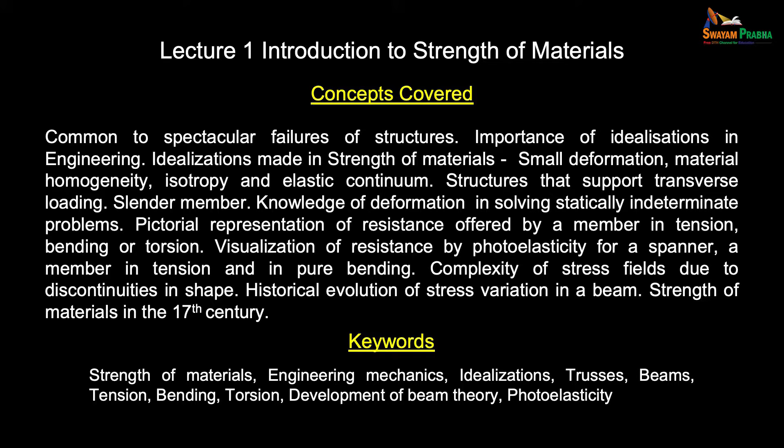So, welcome to the course on strength of materials. In fact, you graduate from rigid body mechanics to deformable solids. The moment you go to deformable solids, we do not make a step change. We say we will have small deformation. We have always been considering bodies as rigid. We will definitely accommodate deformation, but the deformations are small. How small? That is another question to be answered. And if you look at, you need to have a test, that is what is shown here.

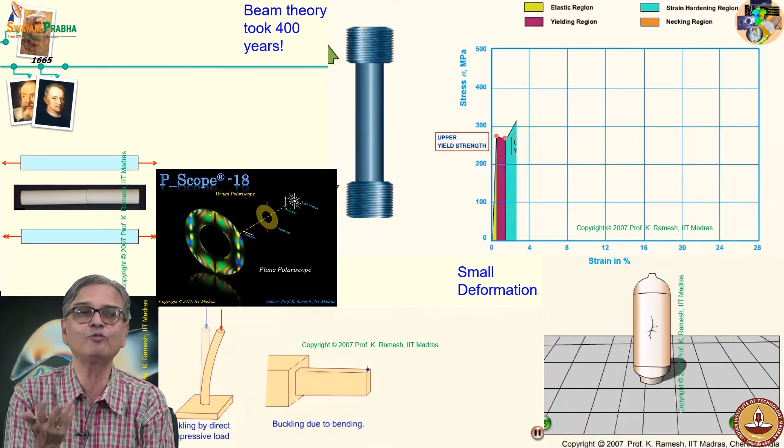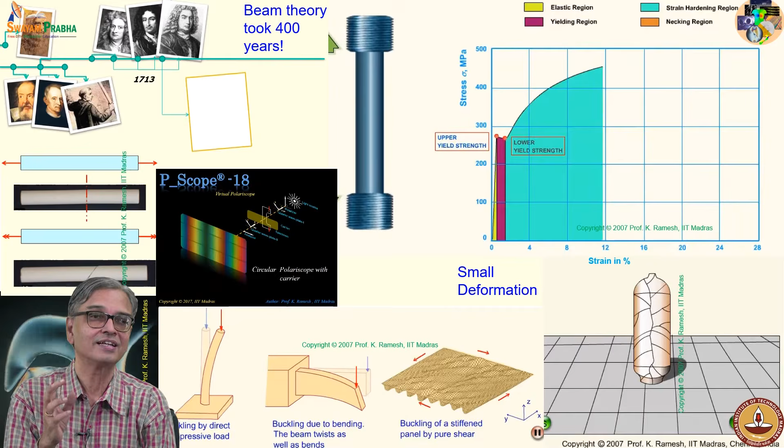And if I look at the curve what you had seen, mathematically how will you state that? Is it linear or non-linear? It is non-linear, fine. But cleverly if I say it is small, I can make it linear and make my life very simple. And this also summarizes some of the results.

You had spectacular failures, and you can also see the stress colorfully. There have been very simple failures which you don't want to have in your day-to-day life, particularly these plastic chairs. They are known for their notoriety. Many times they buckle. The fall appears simple, but it can be crippling you, because if there is a tendon tear, you had it, fine.

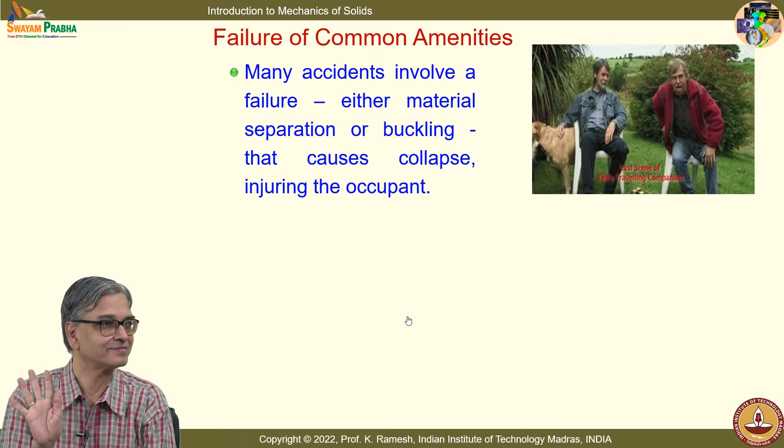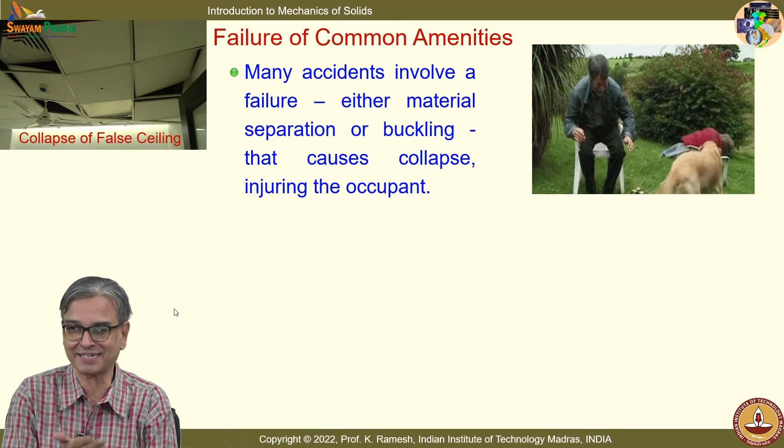And you are sitting in a nice room with a false ceiling. Imagine if the false ceiling falls like this. This in fact happened, fine. You don't want that to happen. That means you need to find out, have I made the selection of the cross section appropriate?

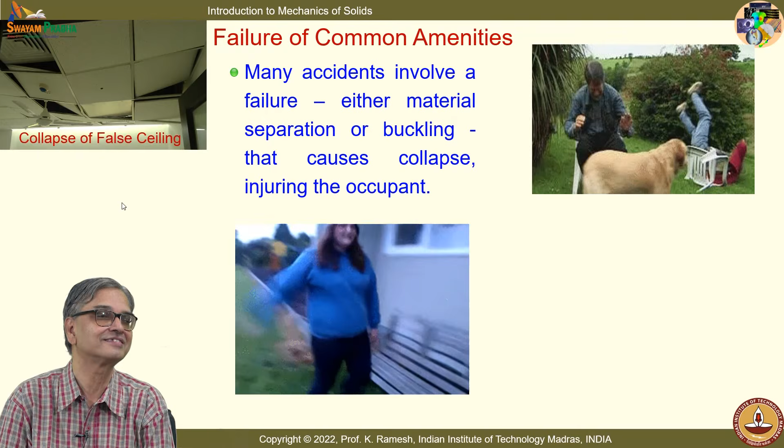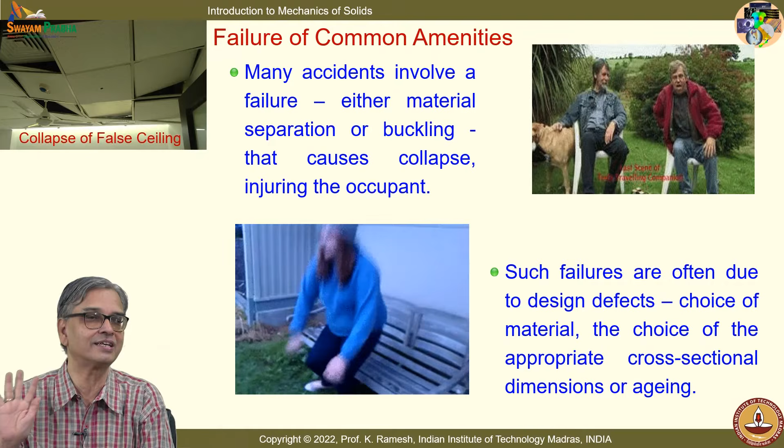And you go to the garden and you want to sit, you don't want to have a surprise like this. If you look at all of this, you find its choice of material, poor quality design, and also due to aging. Because if you see a garden chair that is exposed to natural elements, over time the strength degrades, fine. So, after learning this course, you should be able to sit comfortably in a chair, and you should also have your room well protected.

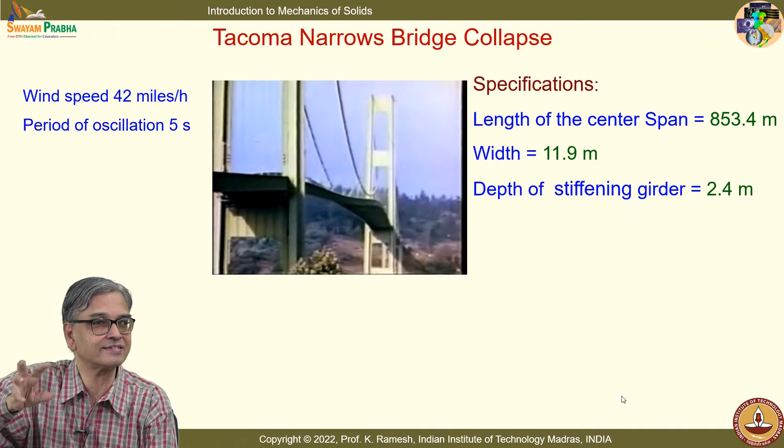So that led to development of cross bracings to sustain the wind loads. It started vibrating at 10 o'clock, vibrated for about 40 minutes, and it failed by torsional mode of vibration. Fortunately, there was no major casualty except one car was falling into this.

And there have also been failures precipitated by temperature change. Imagine people have built ships, this is during World War II, and you find thousands of them having failures, not one or two. If there is one or two, you can say that there is some kind of a manufacturing defect that has led to the failure. People also switched over from riveting to welding, and welding was in the nascent stage in those days. And when you had thousands of failures without your enemy bombing your ship, that is a cause for concern.

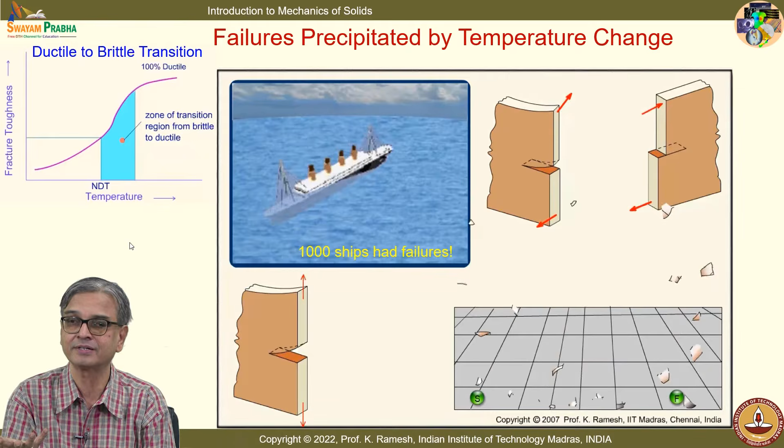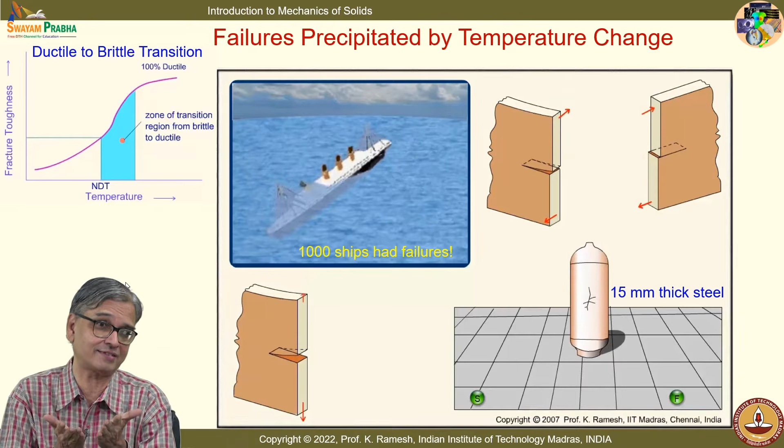Then you also had in the 1920s, this famous molasses failure in Boston. If you look at this, there was a temperature change. It was made of 15 millimeter thick steel, and you all know it's not made of glass. You can understand glass is brittle and steel is ductile. If that breaks like a brittle material, it's a cause for concern.

And you also have in your material science, you will probably go and learn there is a ductile to brittle transition. It happens at low temperatures, and there was commonality between the two. When the temperature was about 4.5 degrees, the steel gave way and behaved like a brittle material. And this is accommodated with the development of a new set of mechanics called fracture mechanics, fortunately beyond this course.

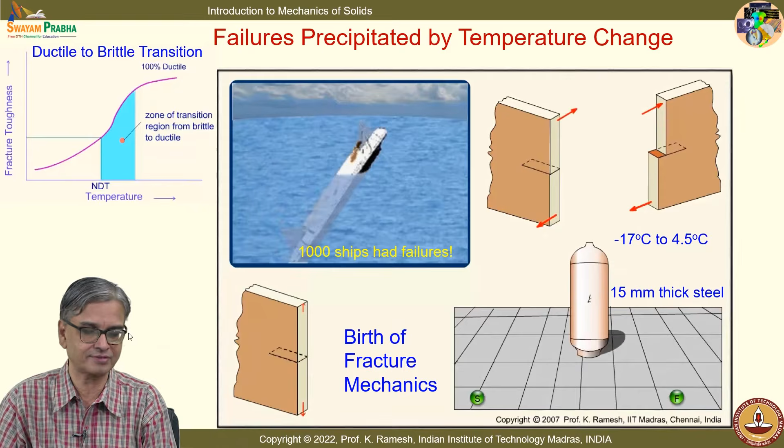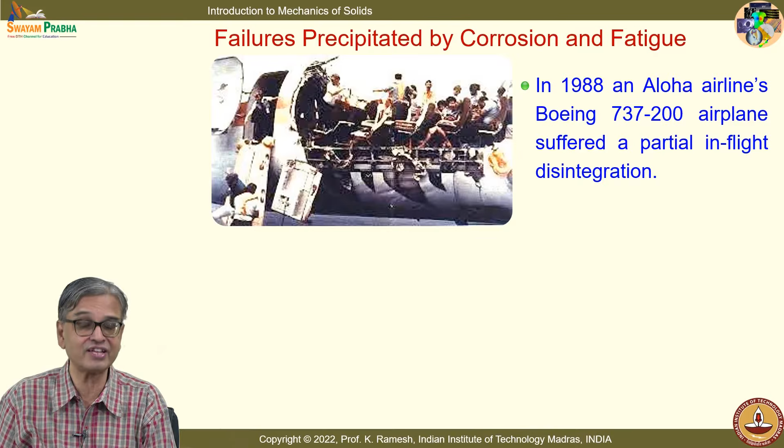And we also had another very devastating failure, the Aloha Airlines failure. The plane was flying at 30,000 feet. All of a sudden, a portion of the roof blew off, and the pilot landed the plane safely. You have to congratulate the pilot.

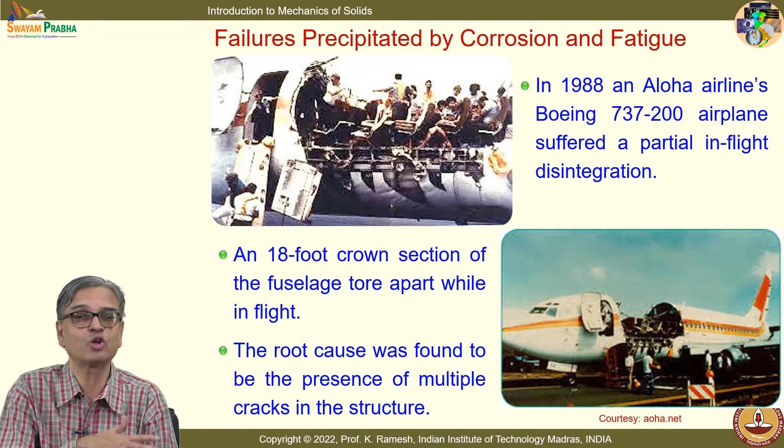There was only one casualty, but people understood that you have to design the aircraft so that it drains the water, otherwise it leads to corrosion. And you also have fatigue that has precipitated this kind of a failure.

There can be no engineering without idealizations. Why do we do the idealization? We would like to make the problem simple enough for us to analyze, because all natural systems are nonlinear and complex. And when you want to mathematically analyze, it's difficult to accommodate all aspects. Those aspects that are primarily important for the phenomena under study, you would like to capture.

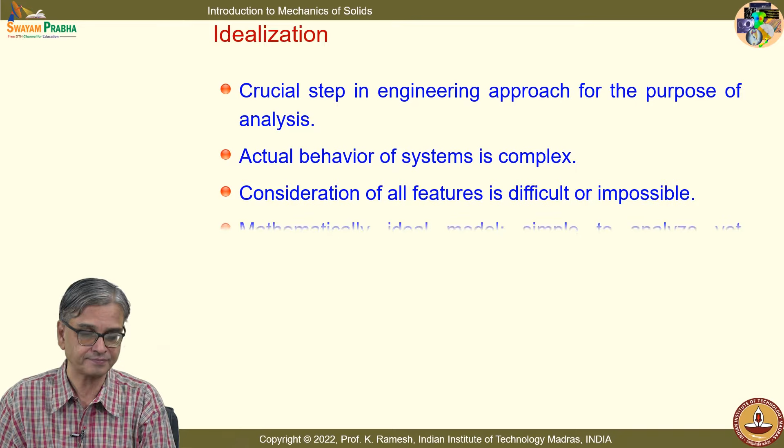What is the way that you can be satisfied that the mathematical model has sufficiently represented the physical phenomena? The only way is it should satisfy the observations or experimental measurements. Without experimental verification, you cannot rely on the mathematical model.

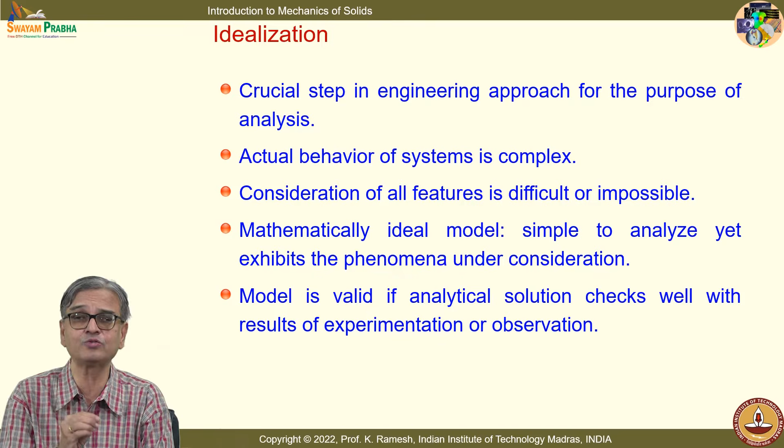So you have to always understand, if DGCA has to permit the aircraft to fly, it should satisfy the safety norms, not just that your design is sufficient. So that is taking safety into consideration. You always need to have experimental information.

When you look at engineering mechanics, you had done the first course, mechanics of rigid bodies, which was divided into statics and dynamics, and further subdivided into kinematics and kinetics. So you could do one full course considering the body as rigid. No longer can you live in that domain. You have to graduate, so now you go for mechanics of deformable bodies.

Here you start with strength of materials, where you cleverly conjecture the deformation, select cross sections, make idealizations, so you avoid solving differential equations. Then you graduate to the next level of course, where you solve the differential equation and solve more complex problems in theory of elasticity and much more complex problems in theory of plasticity.

In contrast, in mechanics of fluids, even when you analyze the ideal fluid, you solve differential equations. So there is a fundamental difference. In this course, we would do thought experiments, try to get it from inference, and also develop the equations mathematically. A rigorous mathematical approach will also be there.

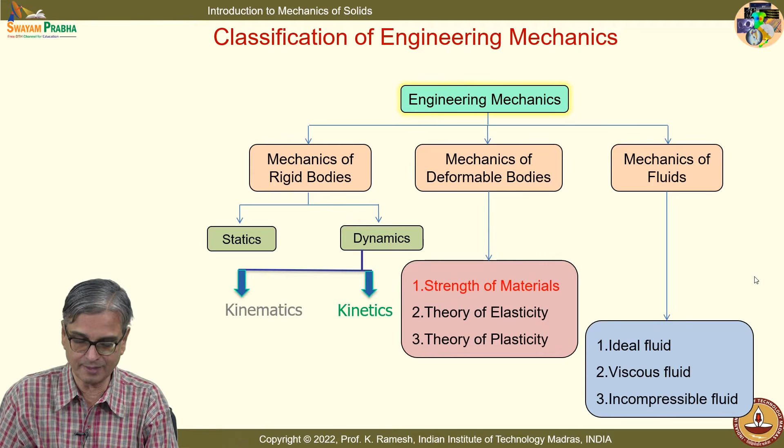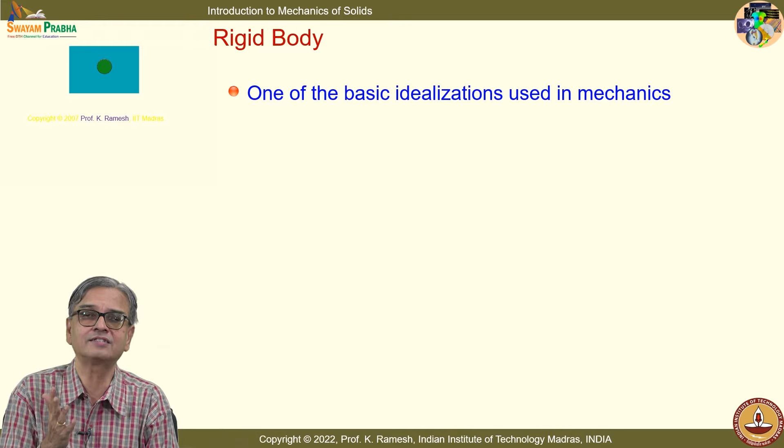In the previous course, you considered the body as rigid. When do you say the body is rigid? What is the way you idealize the body as rigid? What does a rigid body mean? No deformation, otherwise the distance between the particles remains the same. Is it really so? It's an abstraction. You are talking not only about the physical abstraction, but also the physical action.

In the previous course, you have left and right used the concentrated load concept. The concentrated load concept goes hand in hand with rigid body. What is shown in this insert is you have a distribution. From the distribution, you find out, using composition and resolution of forces, a concentrated load. So you keep your eyes half closed.

Reality is always deformation, however small, there is deformation. At suitable magnification, you will be able to perceive it. But we have ignored it. We could solve a variety of simple problems. We could find out what forces are happening on the system under consideration. So it was useful, it is not that it was absolutely useless.

So this is what is summarized here. I said it in statics as well as dynamics: you cannot use it indiscriminately. Physical actions, that is concentrated load, is an abstraction that goes hand in hand with rigid body idealization.

In engineering you have to support transverse load. You have studied trusses in your previous course. Can you recall what kind of forces was resisted by the truss members? It is resisting the transverse load acting on it. But what was the resistance developed in the members? You have determined that by method of sections and method of joints.

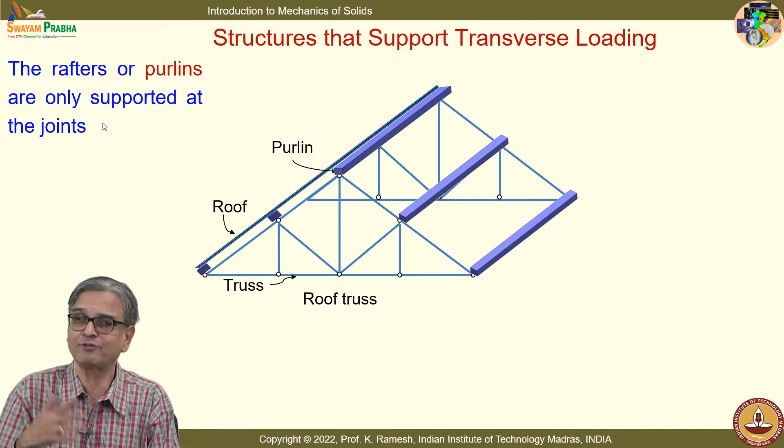Can you recall what it is that you found out? You will also have to find out the sign and then say whether it is axially loaded. I have a transverse loading happening on the structure, but by the way you have constructed the truss, and the restriction that load should be applied only at the joints, and joints have to be constructed in a particular manner, all that you do because you get an advantage: the members transmit only axial load.

But to do that, you also had rafters. These rafters support bending.

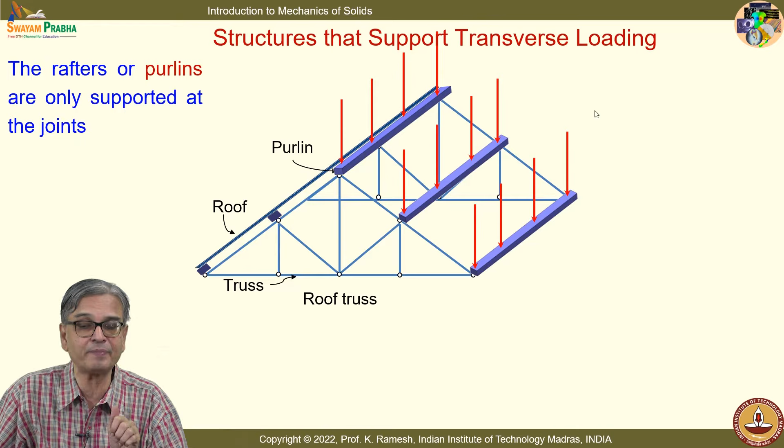Tension or compression is easy to comprehend. Bending is not so; it has taken close to 400 years to understand. We are going to complete it in a few lectures.

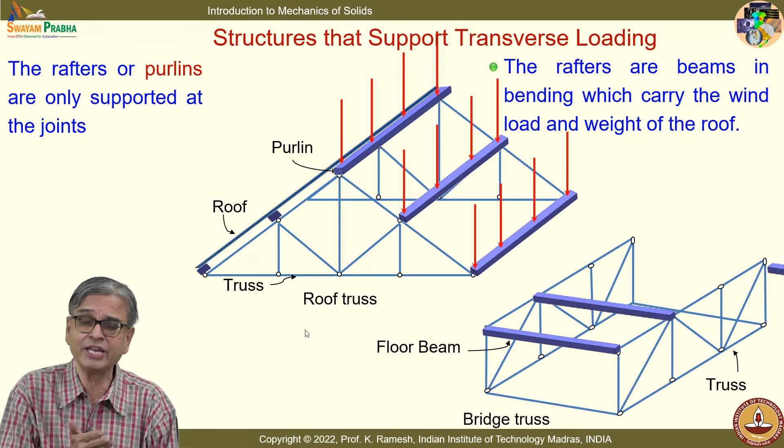You also have bridges. Many of these bridges have truss construction along with floor beams. The floor beams take the transverse load and resist it by bending. But in your previous course, you analyzed only trusses, and found that they transmit only axial loading. This again has transverse loading like this.

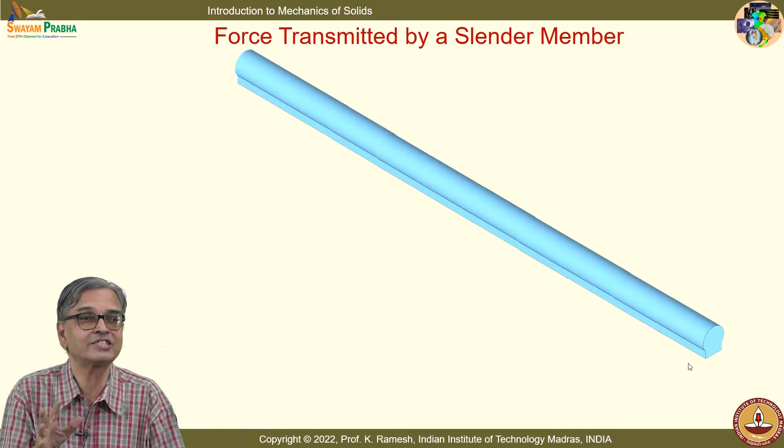Another important assumption you had made is that we confine our attention to slender members. What is the definition of a slender member? The length of the member is much larger compared to the cross-sectional dimensions. We make these idealizations to analyze structures with deformation which can be captured mathematically.

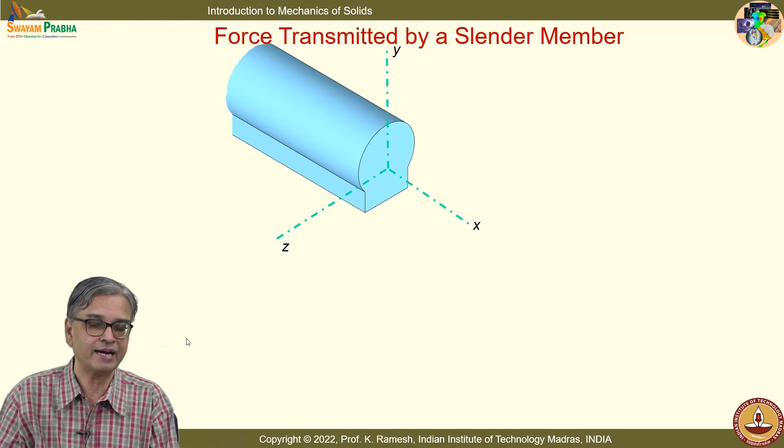You also learned in the previous course that I can take an imaginary cross section, and this imaginary cross section can support a force and a moment. This force can be visualized as 3 components, and moment also can be visualized as 3 components. Whenever the component is tangential to the surface, you call it a shear force.

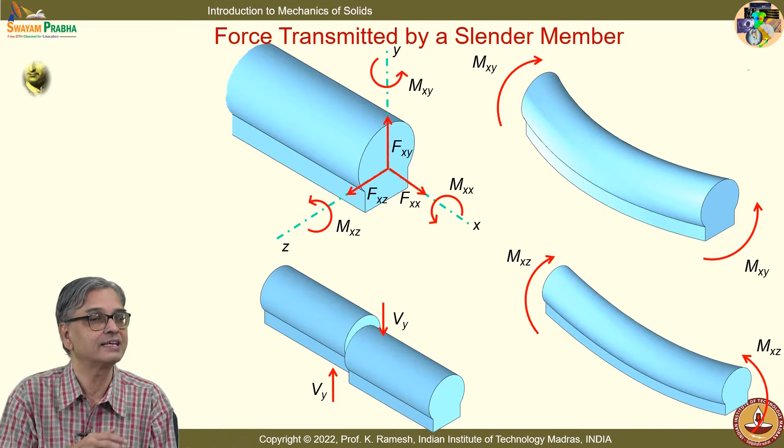You have done, in the case of beams, how to find the shear force diagram. Then you learned if there is a moment, how the beam bends—it can bend in one axis. If I have the moment in the other direction, it can also bend in the other axis. In addition, it can also have another shear force as well as axial tension or compression, or a twist.

This is what we understand now, but if you go back to history, at that time they were really feeling that these arbitrary sections can support tensions. That is the way they started, and the credit goes to Leibniz in 1684 and Bernoulli in 1691.

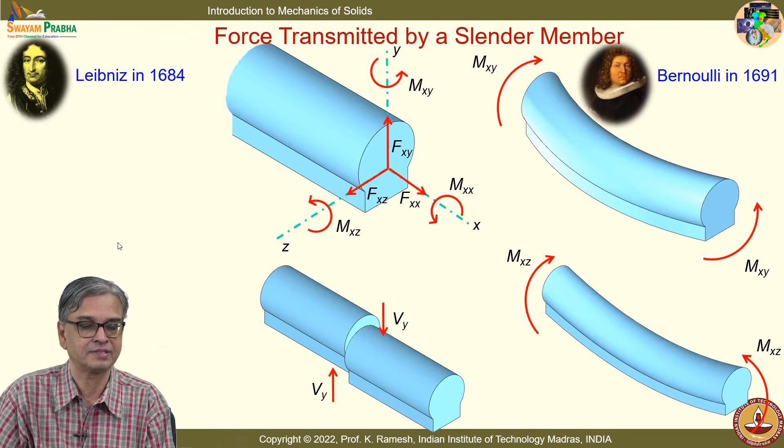The real situations are very complex. We mathematically model it and come up with a result closer to reality. That is the difference between engineering and mathematics. We bring in correction factors, stress concentration factors, and somehow wriggle out of the situation. We want to provide solutions to complex problems.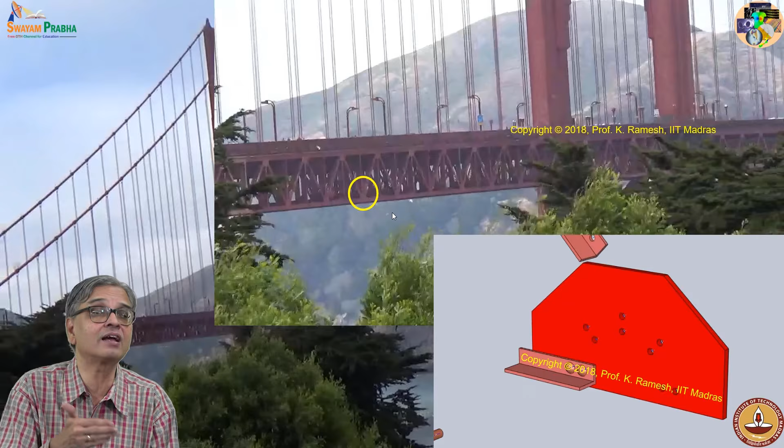If I have a closer look, I can see the truss and also a joint, how it is constructed. You have learned that at this joint you should have a concurrent force system. You have a gusset plate, you join the members, all done carefully so that none of the members forming the truss are subjected to bending. Even if it bends, even if you have to consider the self weight, you simply lump it in the joints and proceed as an approximation.

Because now you have software which will find out the actual stresses, and it is all very efficiently designed. Do not carry the impression that you do a crude analysis in your class and the same thing is practiced in real life—it is not so.

You also find various cross sections. As far as axial load is concerned, whether I use the I cross section, channel, L angle, solid rod, or hollow, it really does not matter—it is based on convenience. What matters in the case of axial loading is only the cross sectional area, that knowledge you all have.

The situation is quite different when the member has to support bending or torsion. Cross section matters. It is not only the cross sectional area size, but how the cross section is made—that matters.

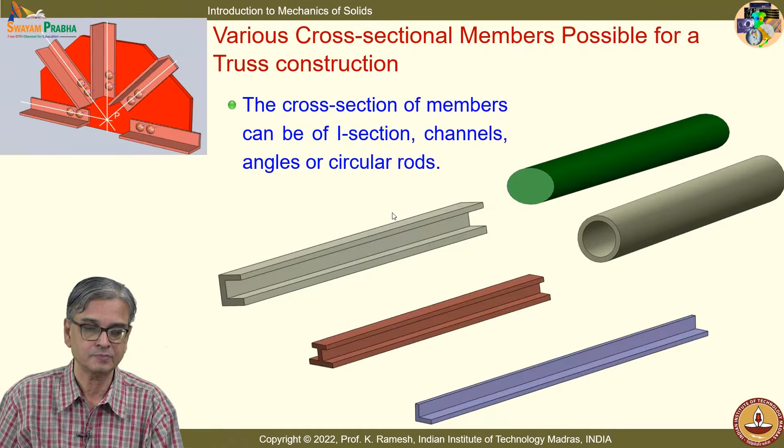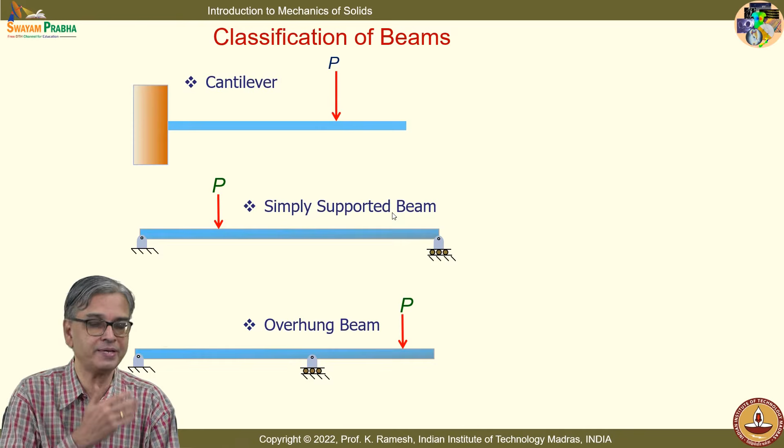You have also seen that by considering the body as rigid, you have happily solved problem after problem on beams. I have two families—I have shown the first family, I am showing the second family. Can you recall, is there a distinct classification in the first column and the second column? Is there any distinct difference? Do you perceive it?

So the first column you say is statically determinate, because I can find out all the forces in the system with the help of equations from statics. The second set, the equations are not sufficient to evaluate the unknowns, and you label it as statically indeterminate and you close your eyes.

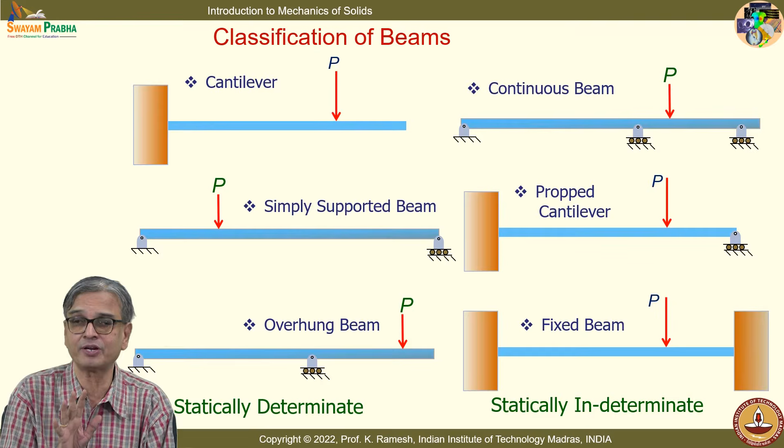But in reality, you have to find a solution for that also. Unless I bring in the deformation, it is not possible to solve these problems, and bending deflection is very complex, so we will postpone it. The idea is you cannot live on the comfort of rigid body mechanics, you have to graduate to deformable solids.

And you can also draw axial force diagram, shear force diagram, bending moment diagram, twist moment diagram. Why do you do all that? So in a cross section you find out where these are maximum, the hope being that you determine the cross section based on the maximum, so that it will withstand your requirement.

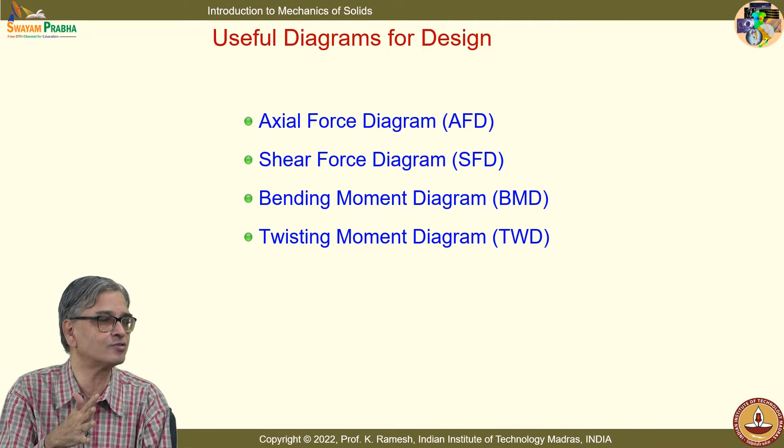You have also done SFD and BMD, and those who have looked at my engineering mechanics course, I discuss at length the possible sign conventions. I used one sign convention followed by Meriam for that class, but in this course we will follow a sign convention for shear: on the positive face, positive direction is positive; on the negative face, negative direction is positive. Bending moment, there is no change.

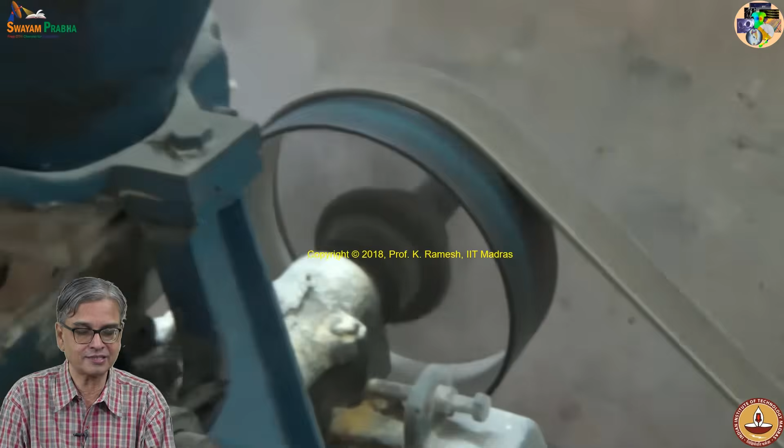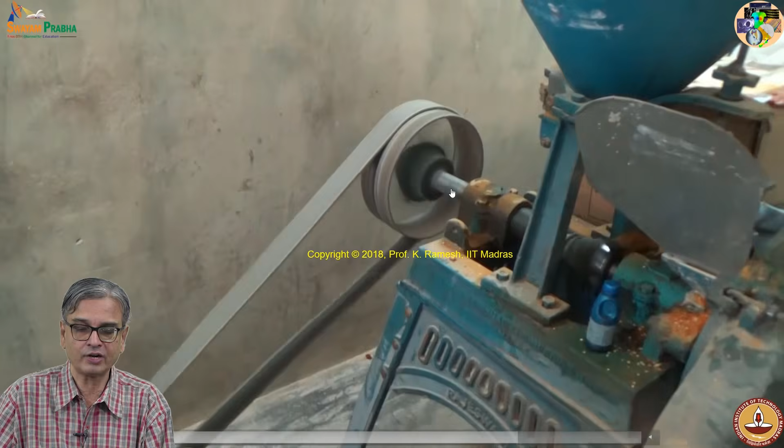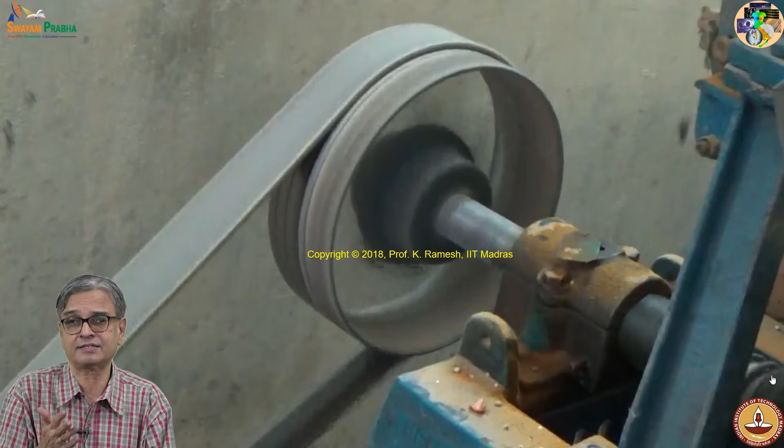And you have a down-to-earth example, this is there in every city, an atta chakki, and we would see a shaft that is transmitting torque. This is also supported by bearings and there are things that oscillate from this. So this shaft is subjected to torque, subjected to bending, and in some cases you can also have axial loading. If I have to mount a pulley or put it in a bearing and so on, I can't have a uniform member.

I can't have a uniform member. I would have steps because I need to locate various members. But in this course, we will close our eyes and consider a slender member. Even that, when you consider deformation, is backbreaking.

And you all know once I bring in deformation, there is resistance to deformation. What is the typical variation? The resistance is termed by the terminology stress. And even before we get into the full course, I thought it desirable that we look at the result that we are going to get.

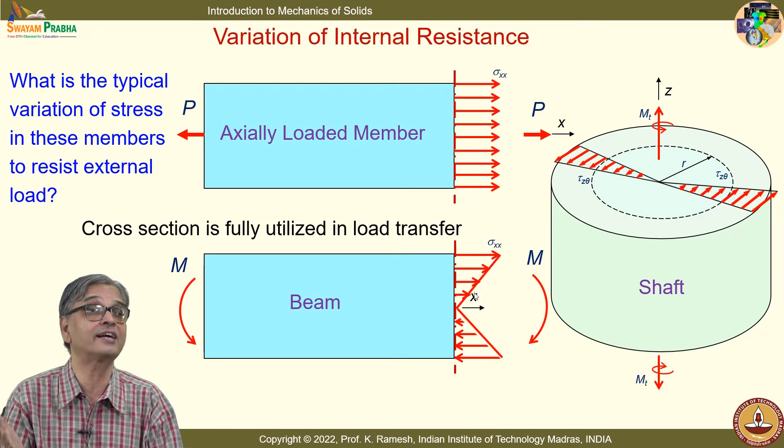We will see that. So the message here is why you develop a truss in such a manner: you utilize the material very well, because whatever material you put in, every part of it contributes to load sharing. And you are also very clever, a transverse load is felt as axial loading.

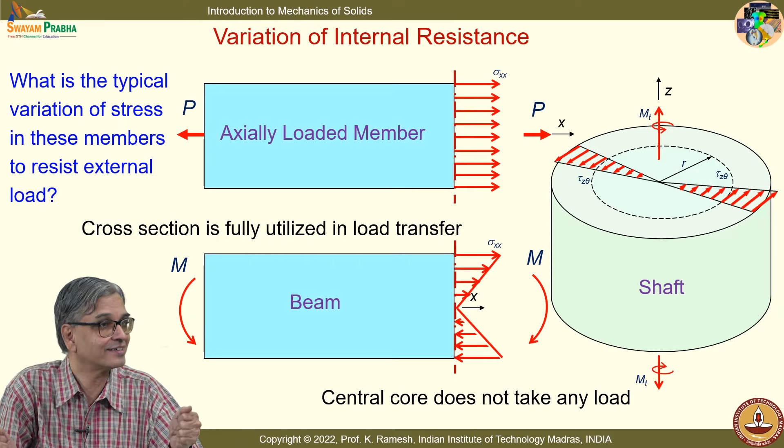Now you have the advantage of this knowledge. If you had no knowledge of strength of materials, even though rail lines span several thousands of kilometers across the globe, you would have made them as solid blocks like this, without cavity on the sides, because you'd want them to be solid and resist without anything happening. In reality, all these are like I-cross sections, you do not have material here. So tons and tons of steel have been saved. Knowledge of strength of materials is essential, and we have saved material because of that knowledge.

The rails essentially transmit and resist bending loads. Now the idea is, you and I have stress due to various reasons. You have to write examinations, I have to come to class and make the lecture go smoothly. There is no way that you can take an X-ray or some photograph and find out what level of stress you have.

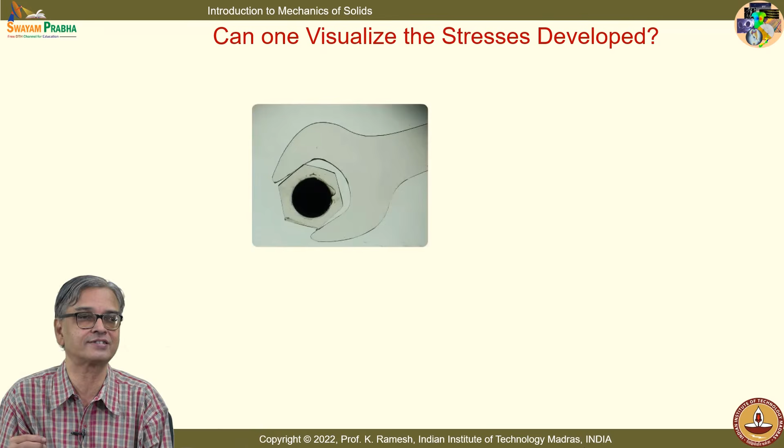Fortunately, nature is so benevolent. You have a methodology called photoelasticity that gives you the stress pattern in colors. As children, you would have had the opportunity to tighten a nut with a spanner, so that is what is shown here. For me to show you colorful fringe patterns, these are not made of metal, but a suitable plastic amenable for photoelastic analysis.

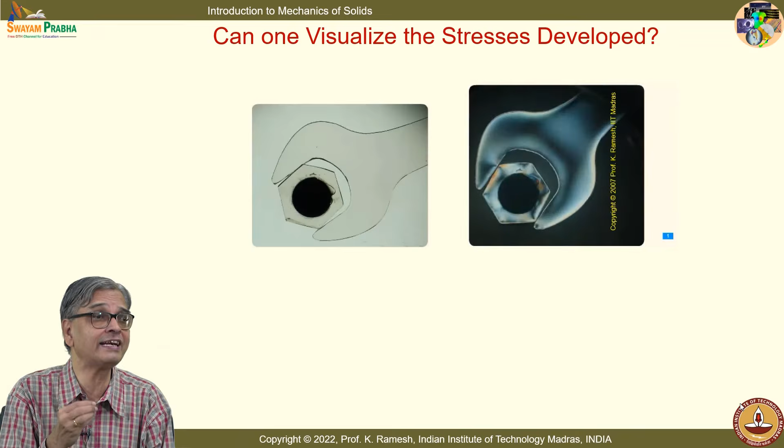When I view it in the polariscope, I see that as the load is increased, more and more colors develop. Do you see that? So you can infer that the colors are directly related to the load transmitted by the member, and you can see that clearly. You observe the fringes developed here, and you also see the cross section - it is not constant, it is increasing in regions where more stresses are developed.

If you look at a spanner, it is a well designed machine component. Even with this course, or in the next course, you would not have a solution for this - it's too complex a problem. But if you go to an experiment or a numerical method, it is easy for analysis. So the first inference is: I have beautiful colors, and I could visualize they are related to the load applied.

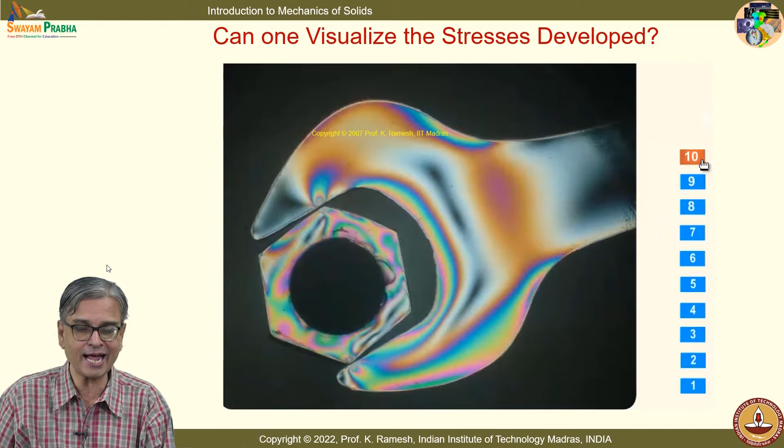With this background, we will go and see what happens when I apply axial tension and bending to the same material. I have a simple beam made out of this, and I get colors like this. As we said, over the cross section the response is uniform. What do you see in colors? You see that at every point when it is axially loaded, it's a uniform color.

What happens when I go to bending? I have all the colors in this spectrum available when it is bent. So the response from an axial load and the response due to bending are different - that you can clearly see.

Now I will also repeat it with a smoother variation. You observe how the bending loads are reflected as resistance in the colors. You actually find that the fringes are appearing and then move towards the center. If you look at these, I have labeled them 0, 1, 2 and 3, and if you find the distances, they will be equal. So by inference you can say the variation is triangular like this.

Now let me address this - I said that in this course I am going to take a member which is slender, without any step, without any hole. But in reality, you can't have anything without a step or without some hole for you to join and so on. I can also conjecture and get an idea of how the stress problem becomes, from the same photoelastic approach.

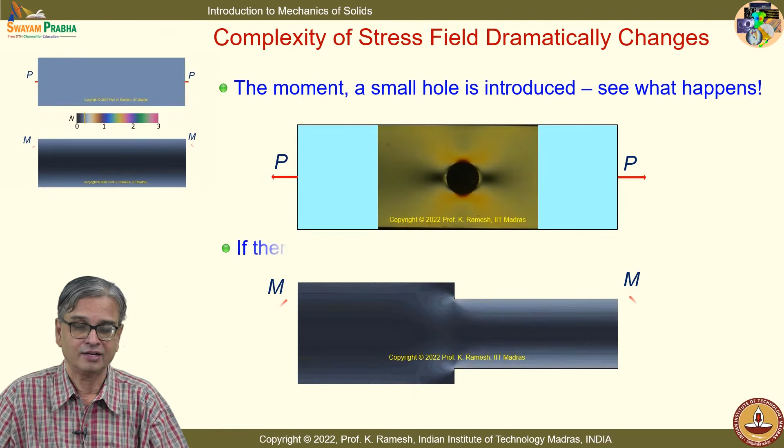Okay, I put a hole and then see what happens. For you to make a new design, you get a flowery pattern - you can print it on your cloth and sell it. But it's too difficult to analyze mathematically. And look at what happens when I have a step.

I already told you, when you have a shaft, you will have to have steps for putting the pulley. You have to have a step for putting a bearing. You can't avoid that. But the moment I put any one of these aspects, the problem becomes very complex, fortunately beyond this course.

You can also make one more interesting observation. In the case of bending, we have seen parallel lines essentially. I have a line drawn here. In this zone, it is still parallel, and in this zone it is still parallel. Some disturbance happens in the vicinity of a step. That is how engineers handle it - with a correction factor or stress concentration factor, to wriggle out of the complex problem.

So even to understand that a beam will resist which has a triangular variation, that was not a simple thing to visualize. So now let us look at the idealizations.

Small deformation - the reason why we go for small deformation is you can make the problem much simpler to handle, and the implication is we work on undeformed configuration, but we will also make a violation. When we want to go and do buckling analysis, I will have to write the governing equation only in deformed coordinates. Fine.

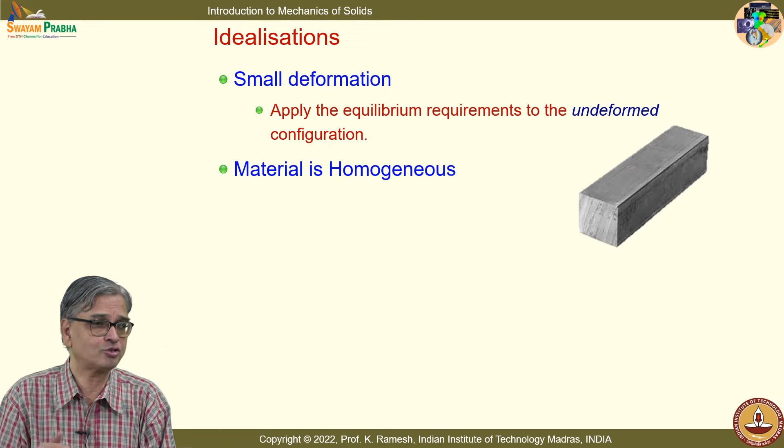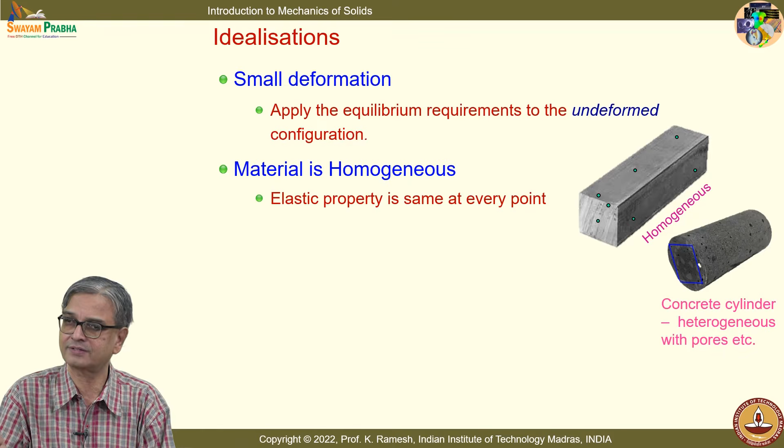And you also say the material is homogeneous. What is the meaning of homogeneous? When I consider any point, the properties remain same, elastic properties remain same. And you have a counter example - take a concrete block. If you have seen how concrete blocks are made, you find they put pebbles, cement, sand and all that, and it also has pores. It's definitely not homogeneous, but you analyze it as homogeneous - that is a different story.

And you also idealize that the material behaves in an isotropic fashion - you take any direction, the elastic properties remain unchanged. These are all idealizations that make your life simple. Another important one is it is an elastic continuum, no defects. Even if there are defects, in this course we will simply close our eyes. You have fracture mechanics which takes care of all the defects. Fine.

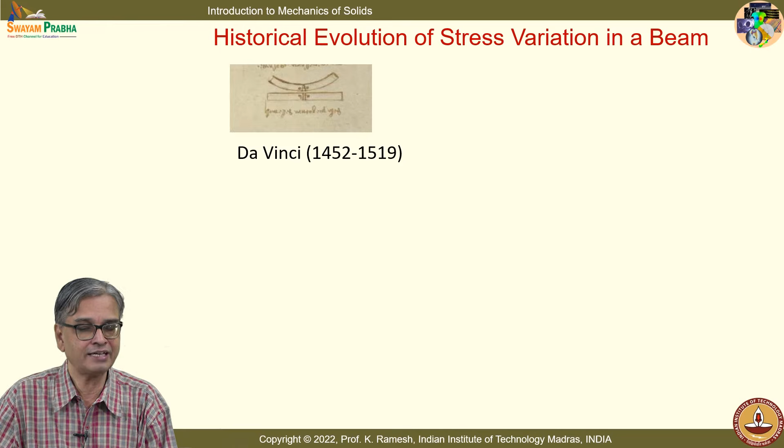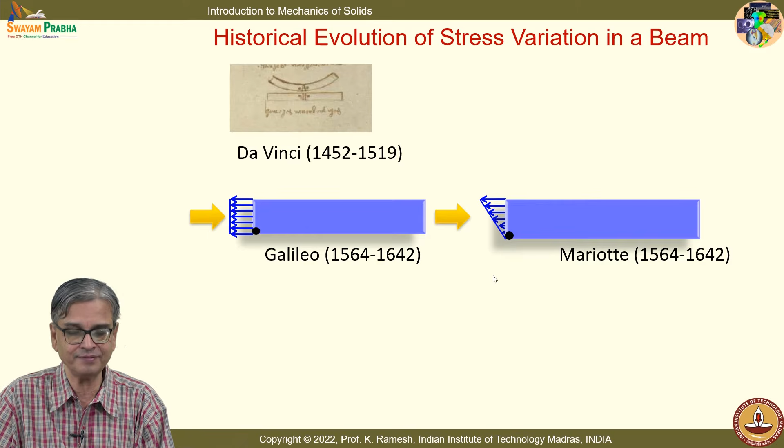As I said, historical evolution of stress variation in a beam, it all started with Da Vinci, who had in his notes diagrams drawn like this. Galileo conjectured that the resistance is uniform, and Mariotte conjectured a triangular variation in one fashion - he also quoted another variation like this. Then you had Parent, who also conjectured triangular variation, but the neutral axis, what we will call later, is shifted. So it was finally Coulomb who got the same triangular variation that I showed as the result we are going to learn in this course.

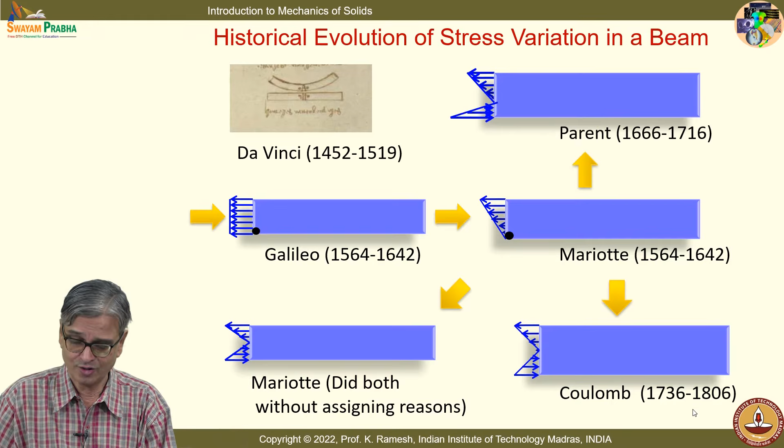So if you look at the time span, it has taken close to 400 years. So it is not a child's play. If you do not understand some aspect of the course while developed, do not feel discouraged. So we look at some of the historical developments.

Da Vinci, 1452 to 1519, was the first person to document a theory. Until then people were not documenting. He had also written a book - unfortunately it was lost, they could not locate it. They could locate it only in 1967. So whatever knowledge he gained, others had to struggle from scratch. But historians go back and reinterpret what he could have understood at that point in time. That is also interesting to see.

And we sit in Newton's garden - he is sitting with the apple tree and the apples are falling and he is getting inspiration. So we are also getting inspiration by looking at the history in Newton's garden. Recently, there was a storm in the UK and this apple tree got uprooted. It seems they are going to replant it and so on and so forth.

By digging into his notes, people have found that he had the essential features of the strain distribution in a beam, but he did not have Hooke's law at that time. There was no mathematical development of calculus, so he had to wait. Understanding could not be translated into mathematical equations, but he seemed to have understood some of it.

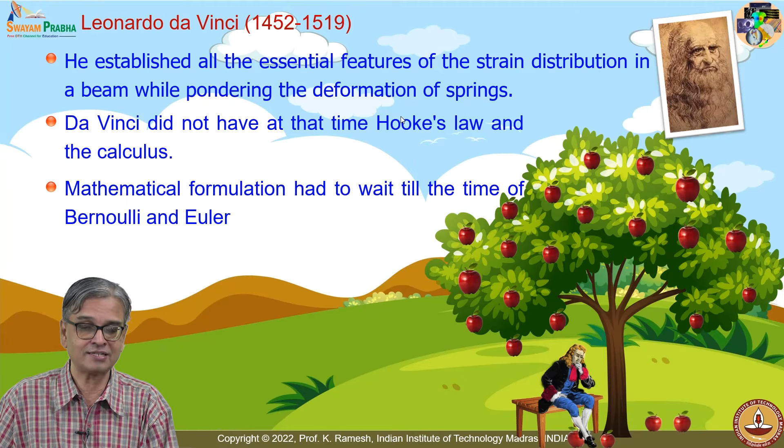Even though he was able to appreciate the stresses that had developed, he was not able to give a recommendation on how to design a beam, what should be the cross section. That kind of solution was provided only by Galileo.

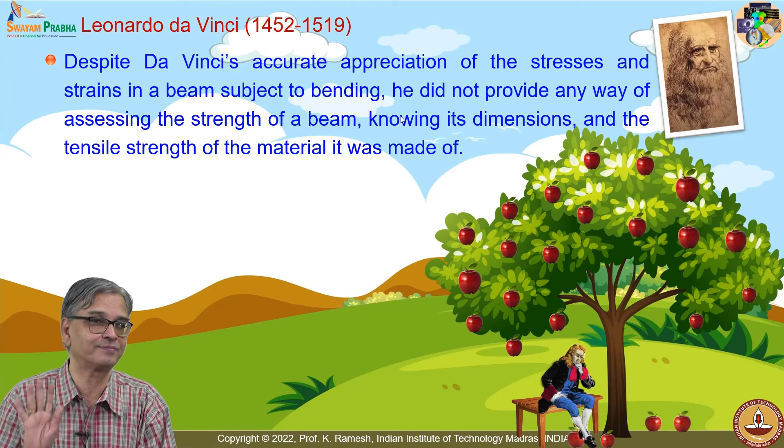Even though Galileo provided it, he had his own limitations. Galileo was 1564 to 1642, the first person to publish a solution to this problem.

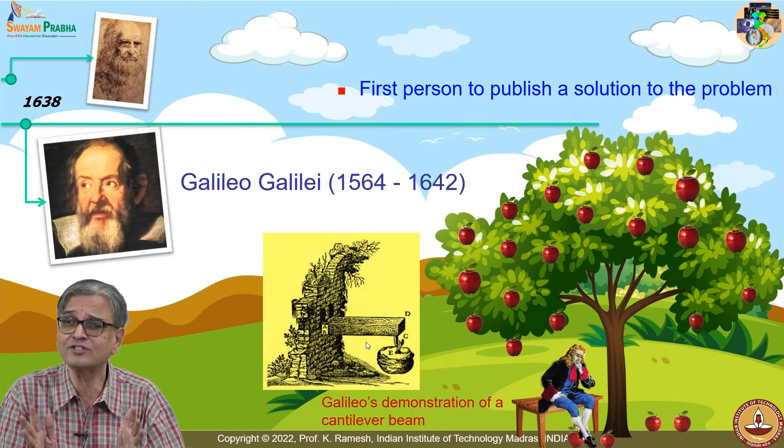And it is made of wood. Wood is not an isotropic material, its fibers are aligned, so it is a complex material.

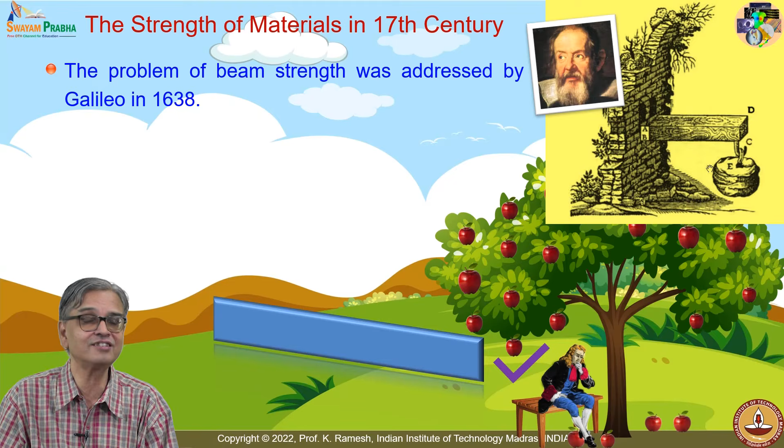So strength was addressed by Galileo in 1638, but he found a very interesting answer. The answer was, if you take a scale and put it in this fashion and apply an end load, clamp it on one end and put an end load.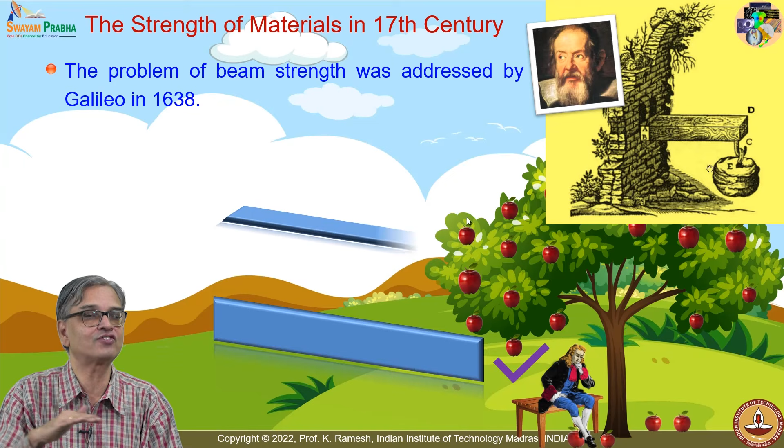There is a stark difference between the moment of inertia that you have to calculate. He had got that intuitively. So he was able to say you should not use the beam in this fashion, you should use the beam in this fashion.

The ruler offers more resistance lying on the edge than when lying flat. It is a very important, valid observation. He did not have a mathematical explanation for it. We can give a mathematical explanation once you learn bending.

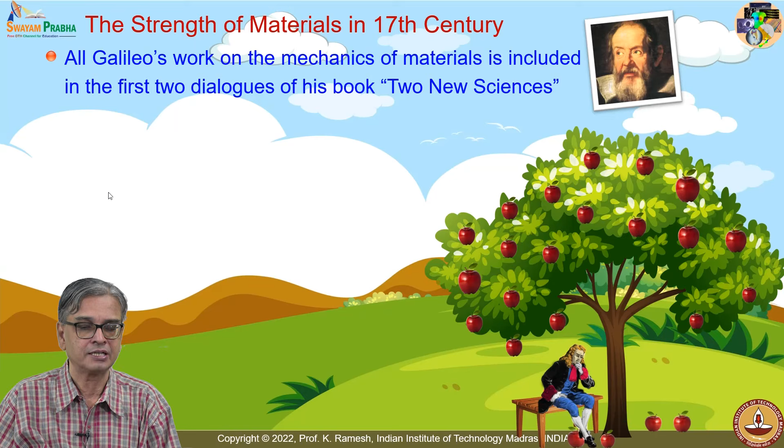And they have all worked on tension. In simple tension, the strength of a bar is proportional to its cross sectional area and is independent of its length. It is a very correct observation. Length does not contribute to it, only the cross sectional area.

Translating this understanding from a tension specimen to bending was not simple. They have all understood what happens under tension, but only some observations on bending.

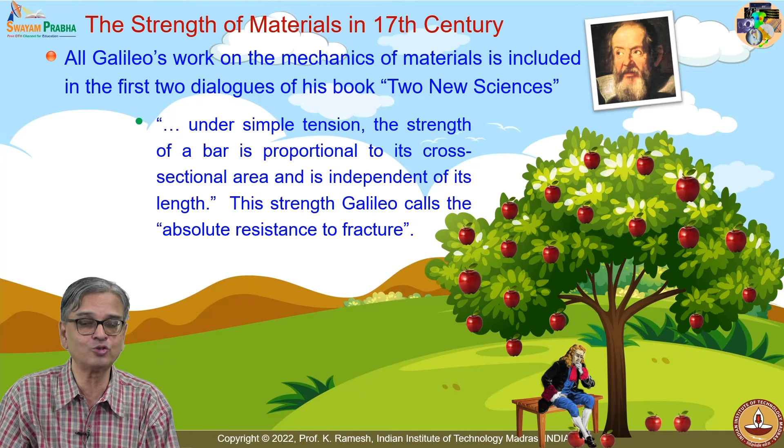And the reason I said certain aspects earlier, even the problem is complex, because I am having shear force and the bending moment varies across the length. While we develop the beam theory, we are very clever.

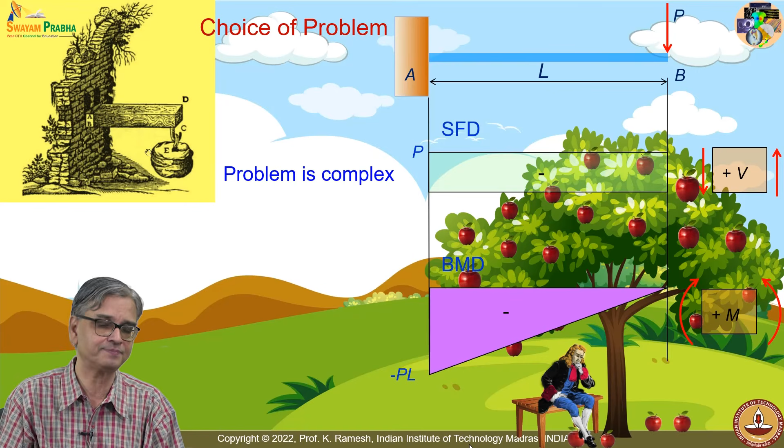We will take a beam under pure bending, we will avoid shear. So why could Galileo not succeed? He took a complex problem. He took a beam that is not slender. The material is wood, it is orthotropic.

But they also looked at what happens. When you want something to support load, you want that to be solid, isn't it? Solid means something completely filled. But he found in nature, when wheat is fully grown, the wheat stalks are hollow, and they carry heavy grains at the end.

So he wondered that hollow beams can be stronger. Nature has taught us, but there was no explanation at that time. But when you say hollow beam, what you have to compare is what is the cross sectional area of a hollow beam versus the cross section you make out of the same material as solid.

If you have the hollow beam like this, imagine that this is hollow. If I compare it with the same size of solid shaft, you can't compare, that is not a valid comparison. In strength of materials, we would like to use minimum amount of material.

So he made very interesting observations about bending, but some of them could not be translated into mathematics because he did not have access to it.

And you had Robert Hooke. He was considered the greatest experimental scientist in the 17th century. He was also appointed as a curator for the Royal Society.

The idea is that whenever somebody postulates a new theory, he will try to make a contrivance to prove or disprove that theory. So he was good with his hands, and he was able to look at what happens.

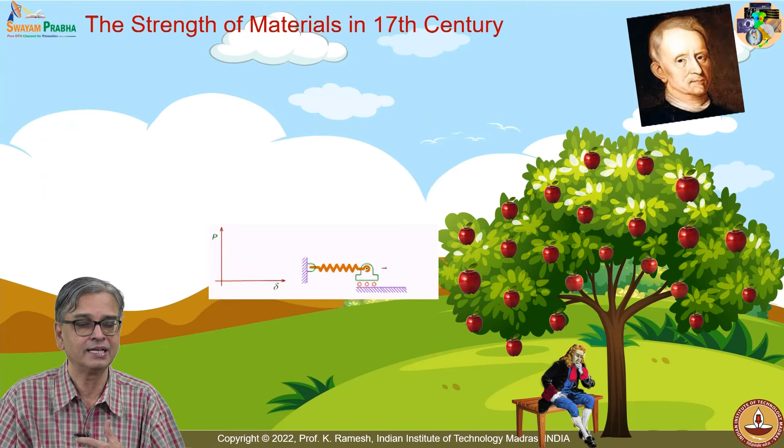And he found a very interesting thing. He found that many materials, when loaded, behave like a spring. In what aspect?

The spring, when you elongate it and leave it, comes back to its original position. And he also found that this varies linearly.

But let me ask a question. Go back and find out, you all have a pen like this with a jotter type of arrangement, you will have a spring. When you put an axial load on the spring, with your background, is it possible for you to find out what is the force transmitted at a general cross section? It is not axial load. Please go back and see.

So when you say Robert Hooke looked at the spring, when you say axial load, when you pull the spring, it is a representation here. I have just put zigzag lines, but actually the spring is coiled like this. So if you look at what kind of forces are transmitted at a generic cross section, it is not axial load. But this example is good to show that there is elastic recovery, and the force deformation relationship is linear.

The resistance developed in an axial pull, or what happens in a spring subject to axial pull, are different. Because you have to understand, you have the background. Let me see, I want to know in the next class what is it that you can do.

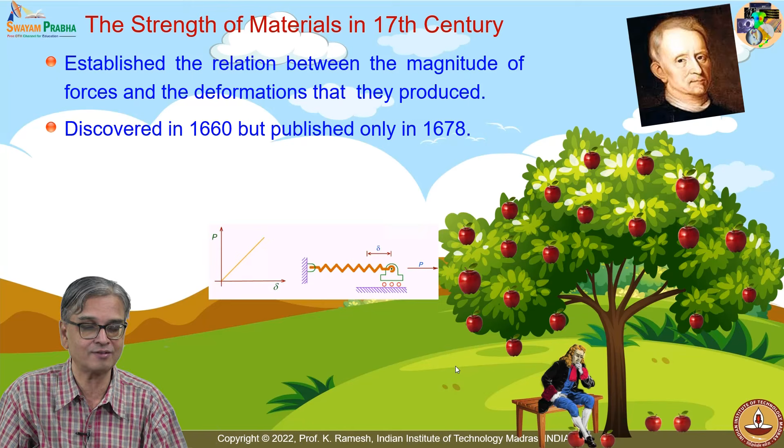And this linear relation formed the basis of Hooke's law. Even though he determined this in 1660, he published it only in 1678. Those days, though my slides are very poetical, nicely colorful, richly decorated, science development has not been poetical. There were fist fights. There were fights where people wanted to say, I have done it first. And they also camouflaged these results as anagrams.

And then, knowledge is power. They were not willing to disclose. Imagine, 18 years he has not published the result.

Then you have Mariotte, 1620 to 1684. And as we have already seen, he had proposed two results of variation in the beam without a reason. So we will have to say that he had right thinking in that direction, but he could not completely succeed.

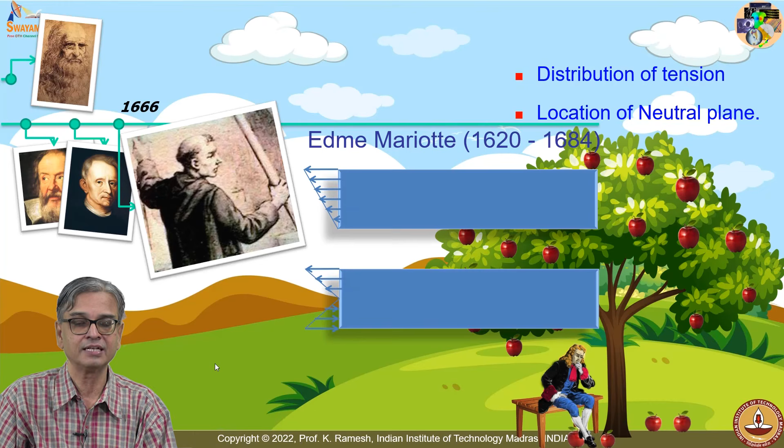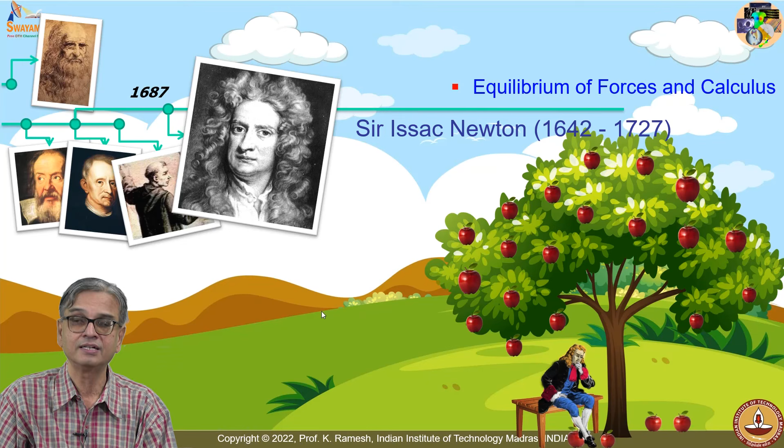He had postulated this variation as well as a variation like this, though this matches with current understanding, there is no clarity. Then you had Isaac Newton, who made very significant contributions, and the modern world gives credit for calculus to Newton. We will see some information from India in the next class.

You also had Leibniz. And I said, the moment you go from simple tension to bending, the shape of the cross section matters. The shape of the cross section does not matter in tension or compression, only the cross sectional area matters.

Even Galileo found it in his experiment. Shape matters, and this was brought out when you do the bending. People also developed something called a section modulus, and that is credited to Leibniz. He has also been credited for development of calculus.

So in this first lecture, we had a brief overview of what is the type of mathematical step that we are going to make. We are not going to live in rigid body idealization anymore. We would take a baby step for deformation. We will make that a small deformation.

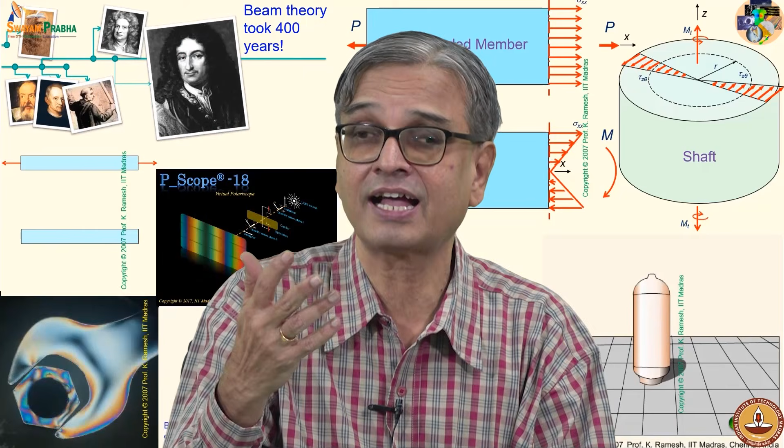And we have also looked at a priori what is the result, how resistance develops in simple tension, how the resistance develops in bending, how the resistance develops in torsion, but we could see experimentally by photoelasticity the play of colors in tension and bending. That has given an inference that the cross section equally participates in axial tension, whereas in the case of bending, the inner core does not contribute to load sharing.

And we have also said material is elastic continuum. We will hang on to it because all our mathematical development depends on that idealization. And I said you have a spanner, and a spanner is made by forging. When you do forging, the material is no longer isotropic, you have grains aligned. But we will still say material is isotropic and live in a comfortable domain.